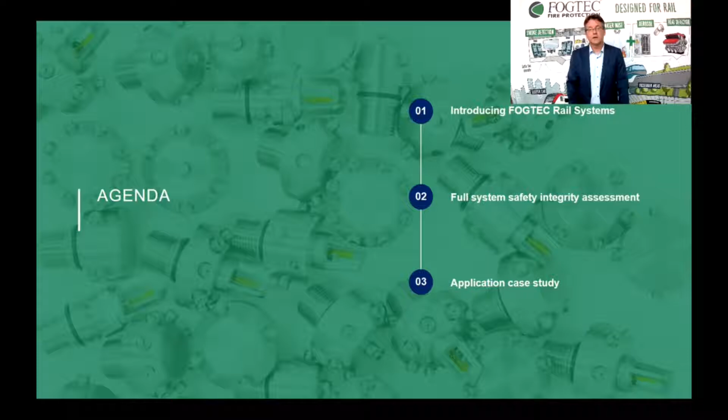Let's have a short look at the agenda of today. I would like to give a quick introduction of FOGTEC Rail Systems and then a more detailed look at the full system safety integrity assessment, and at the end also give an application case as an example.

FOGTEC Fire Protection, based in Cologne in Germany, was founded in 1997 and is a typical small and medium enterprise, and a so-called hidden champion from Germany. The team is mainly based on engineers, and more than 45 partners around the world are supporting the FOGTEC company to implement, integrate, sell, and develop the FOGTEC systems for all different kinds of applications.

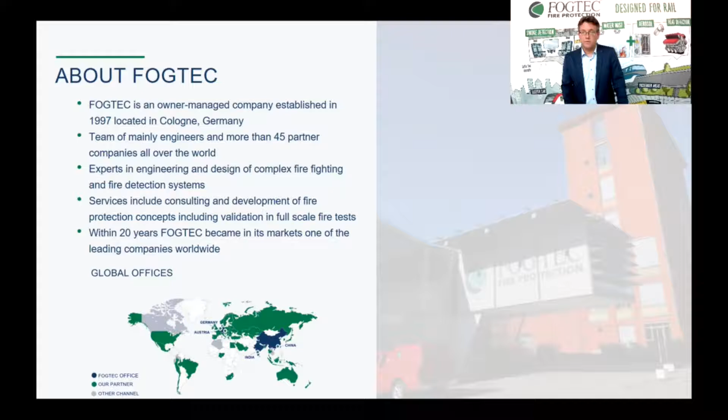Mainly three business units are active in FOGTEC. We have the fixed systems, which takes care of building and industrial applications, the tunnel systems, which are used in underground infrastructure, and the FOGTEC rail systems, which takes care of rolling stock applications.

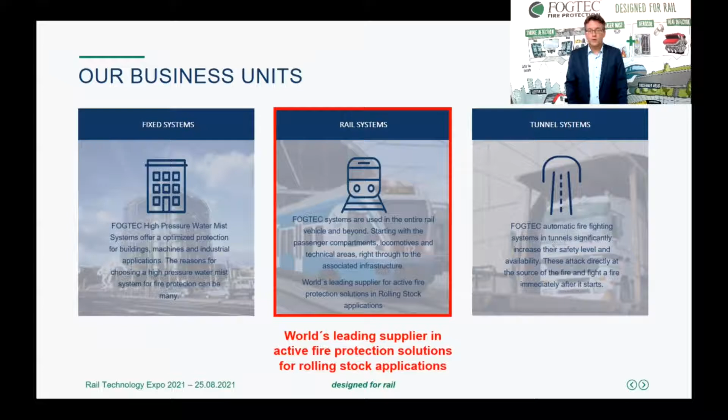And this part is also what we want to have a more detailed look at today, as a world's leading supplier in active fire protection solutions for rolling stock.

FOGTEC rail systems, that means a team, a system provider for active fire protection systems, fire detection, fire suppression, but also the communication behind it. In rolling stock applications, a system integrator with full system verification programs and with its wide product portfolio for railway-specific systems, covering different levels of technology and safety.

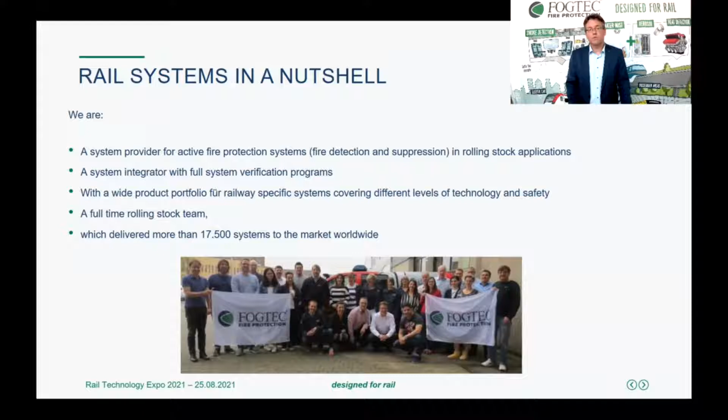One of the big advantages of FOGTEC, an IRIS certified company, is a full-time rolling stock team and a wide range of references with more than 17,500 systems around the world.

If we speak about the FOGTEC products, there's a wide range of different technical levels for CPUs, smoke detectors, heat detectors, and several other detectors, like the in India already well-known smoke aspiration systems, and different kinds of solutions.

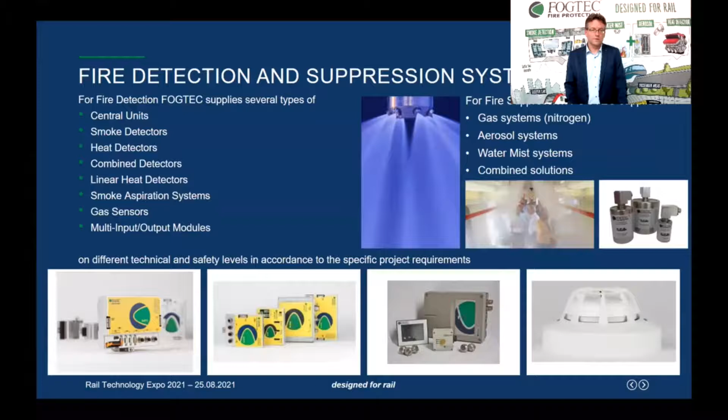Here we can see just an example of how the FOGTEC system, here based on the 5000 series, which is the most used solution, certified up to SIL 2 in the market, is integrated into a train: a centralized CPU, fire detection in passenger areas by smoke or heat detectors, linear heat detectors in the technical areas, a water mist system in the passenger area, and aerosol generator systems in the technical areas.

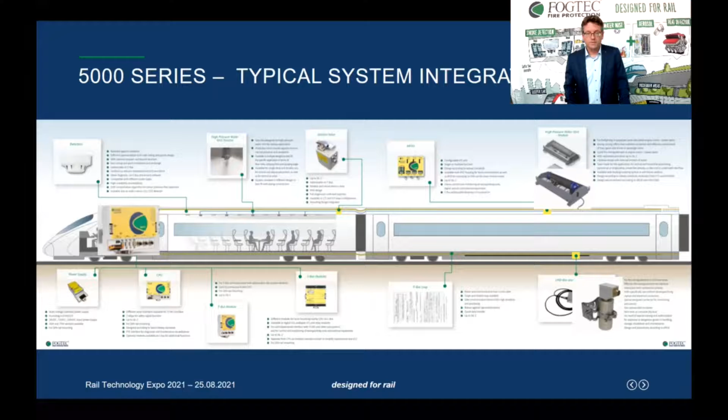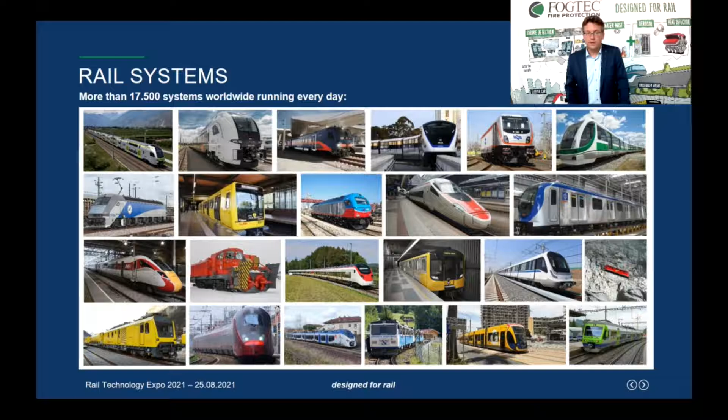Systems like this, or products from our other portfolio with more simple solutions, are used in more than 17,500 systems around the world in metro trains, LRVs, monorails, DMUs, EMUs for regional and long distance traffic, high-speed trains, electric and diesel locomotives, and special trains like for maintenance, cog railways, or night trains with sleeper cars.

But there's also a specific reason that we would like to speak about full system safety integrity assessment today to you. With the developments in our market, we can see that safety, SIL, and similar words and definitions are used more and more and become more and more important.

On the other side, safety, SIL, and other terms are used, unfortunately, a lot of times in the wrong context. And to avoid any misleading action or decision not following the requirements given in the standards, we would like to give a short overview of what it means, at the end, to have a full system safety integrity assessment.

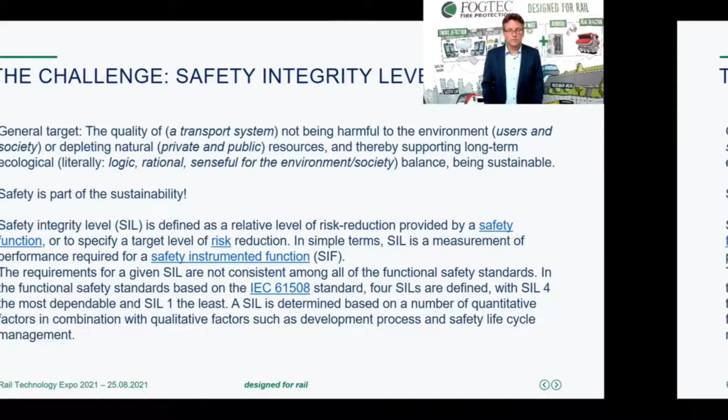The big challenge is the safety integrity level, but basically it could be reduced to safety functions, which have to be defined.

And looking at the markets, the projects, and the development of requirements, we have to understand that an increase in safety, with additional efforts, consultants, and own resources to fulfill the requirements given by higher safety levels, would unfortunately always mean an increase in cost for such systems.

On the other side, unfortunately, a SIL 2 certified or SIL certified system is used very often in the wrong way. System here means, for example, not a few parts or a component — it means that all components of a system have to be certified and run through an assessment.

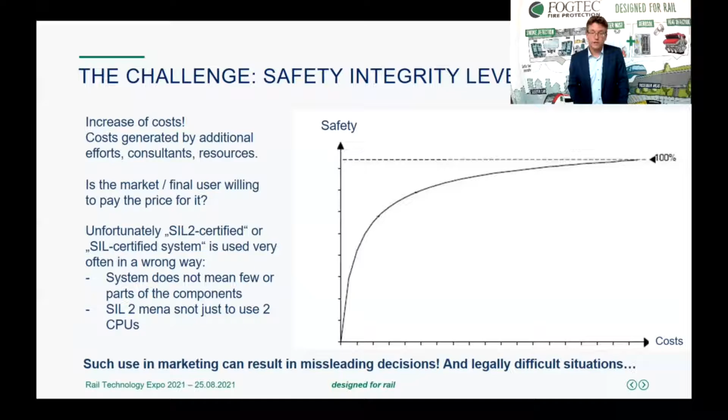I also learned, talking to some customers, that people explained to them that SIL 2 would just mean using 2 CPUs in such a system like we provide to the market. This shows how wide the range of lack of knowledge is in the market, and there's a big need for education. Such use, maybe just for marketing, can result in misleading decisions and legally difficult situations at the end for the people making use of the solutions.

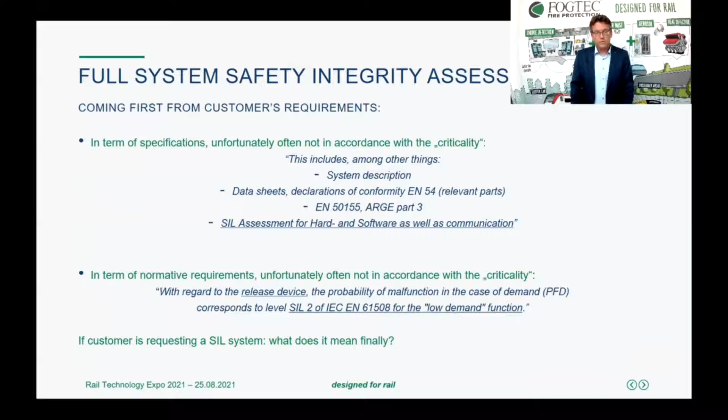If we look to specifications or normative requirements, sometimes it's not really detailed what is requested from the supplier. First of all, there should be a clear agreement about the needed safety functions for a subsystem and the related SIL level which has to be fulfilled. So if the customer is requesting a SIL system, what does it mean finally, and how to find the right solution to fulfill this requirement on a legally right base.

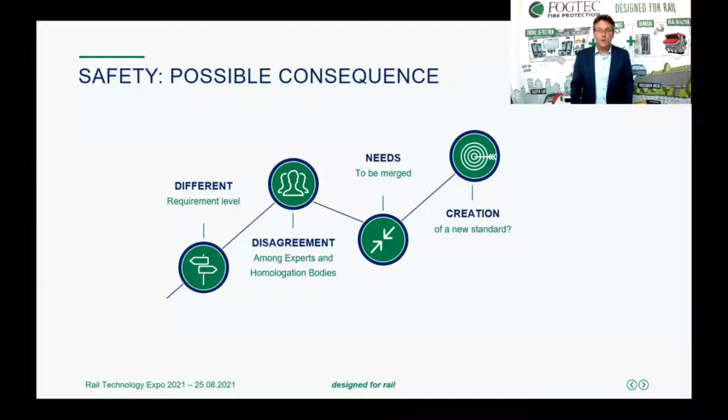This needs always a lot of discussions and clarifications between the parties. But at the end, there should be a target which is clearly defined and which the customer can expect the supplier to fulfill. If we look to the FOGTEC approach, when we started the development of the actual Series 5000, we came from the basic integrity level version in parallel to the SIL solution, because there's a specific own development on that, as SIL 2 is also covering the development process for such a system.

So it means for already developed parts and components, it would be difficult to get a real SIL 2 certification.

Our aim was to have a modular solution, highly flexible, designed for platforms and with full redundancy in communication. We started in 2012 already with the first developments. In end of 2015, we were able to supply the first systems. And at the end, in 2018, we could make a party, let's say, for our first complete system SIL 2 assessment with a certificate.

SIL 2 means here not only some parts of the system are certified or run through an assessment - the whole process of development, hardware, software, and system assessment was done until the last screw. And if it works well, at the end, such a certificate is there, which you can provide to your customers.

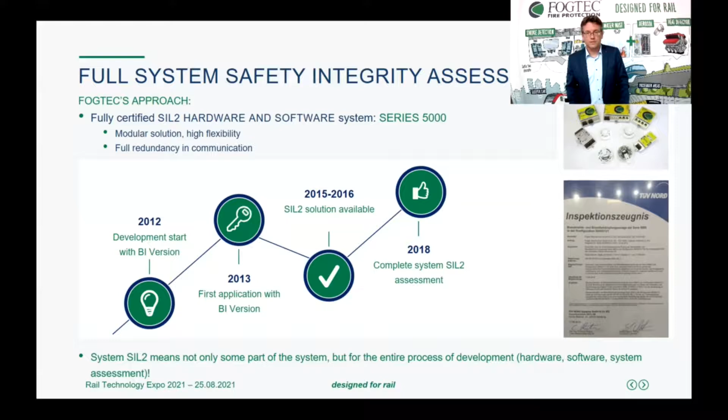If we speak about full system safety integrity assessment, then we have to start from the component level. With the choice of material, we also have to take care about EN 45545, failure modes and related failure rates to meet the reliability targets.

The whole development process has to be assessed by the third-party checkers. And then the validation for all the components has to be done, mostly following EN 50155. And you all know that there was a change in 2017 in the standards, which brings additional efforts and requirements to the components. And all these requirements have to be fulfilled by each single component.

Afterwards, when you move to the system level, a project process according to EN 50126 has to be started for the project itself. The software assessment has to be started according to EN 50657, and then a complete system assessment after you did the software as well as the component assessment. Then you can do the complete system assessment in accordance with EN 50129.

For ourselves, for Series 5000, unfortunately I have to say that we terribly underestimated efforts and costs, and we extended the budget terribly the same way as the time. But at the end, it was done.

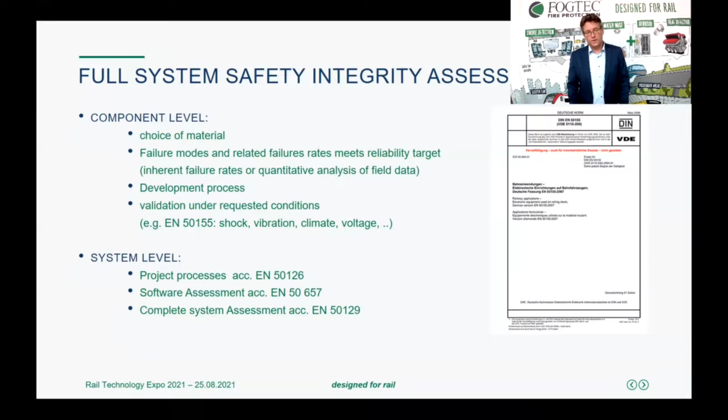And of course, we are looking to bring the documents to these third-party checkers, and have to be assessed from the independent bodies. At the end, there's a huge amount of documentation, a lot of validation efforts requested, always to verify your solution against your specification.

And for each single component, it has to be validated again against EN 50126 as well as EN 50155. Then the software assessment, which I will say something additionally on the next slide, has to follow the rules of EN 50657, and then a complete system assessment has to be done in accordance with EN 50129.

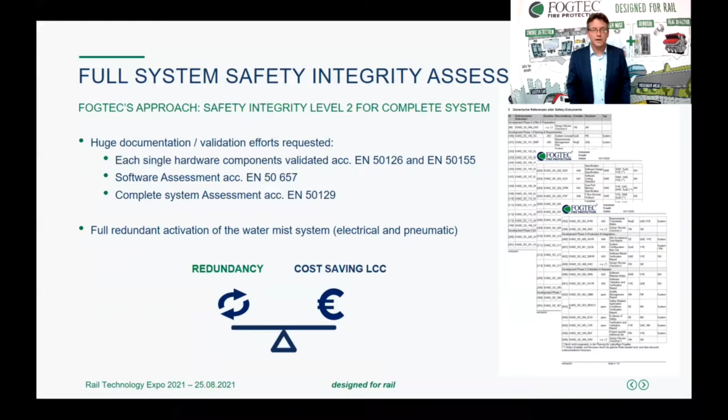EN 50657 came during a time when we were in development on Series 5000, and unfortunately it made a lot of difficulties for us during this development process, because the standard is also requesting changes in your organization and into the company structure, and also to the resource management.

And looking to all the documents which have to be provided, there should be also a very good risk management system behind to understand the real needs and what your company is willing to go and to supply. What we can recommend is that an IRIS certified company, which has normally already implemented a very good risk management solution or process, would have a very good base to fulfill also the requirements in regard to EN 50657.

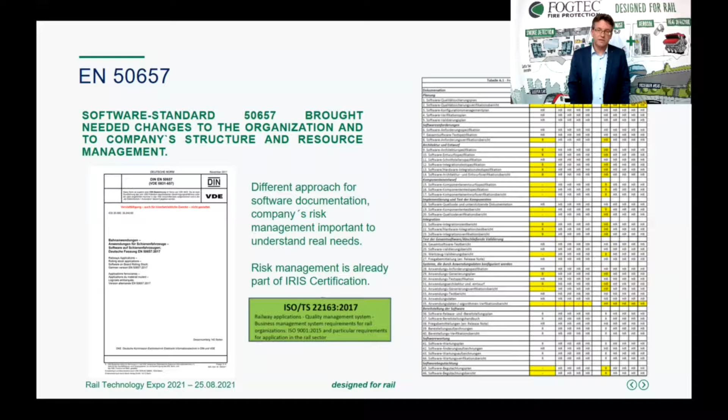And for software, as you all know, it's not simply programming, which is done very fast and taking maybe only 10% of the time, while unit tests, documentation, bug fixing, and all the other things around is a much bigger part of the efforts and also the costs.

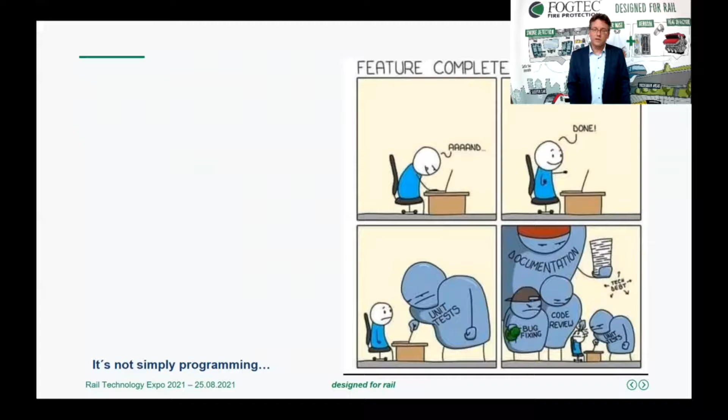To give an idea about a case study where this solution is already in place with our systems, there's the STADLER EC250, called from STADLER GIRUNO as a product family name, and it's called by Swiss Railway SMILE.

This project started in 2015 for us. This SMILE train is an 11 car unit, 200 meters long, with 29 train sets in the whole project. The homologation has to run for Switzerland, Germany, and Italy, and the revenue service should start in 2019.

And the certificate, which you saw a few slides before, released in 2018, was exactly for this project. So in 2018, this job was done and ready right in time for the revenue services.

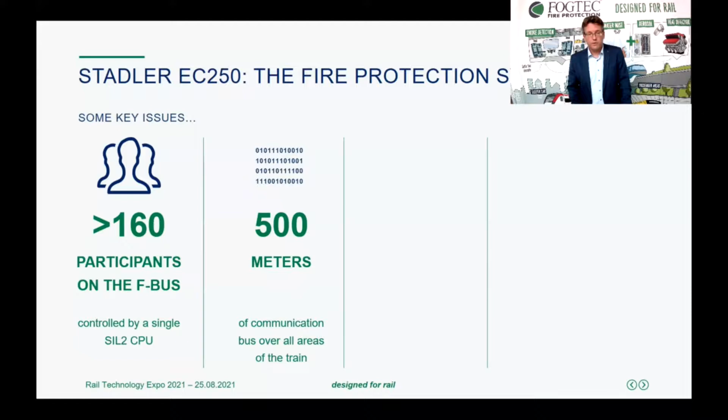Some further key issues: in our system here, we have more than 160 participants on the F-bus, controlled by a single CPU. The whole bus communication cables run through 500 meters in length. There's one centralized cylinder system on the train.

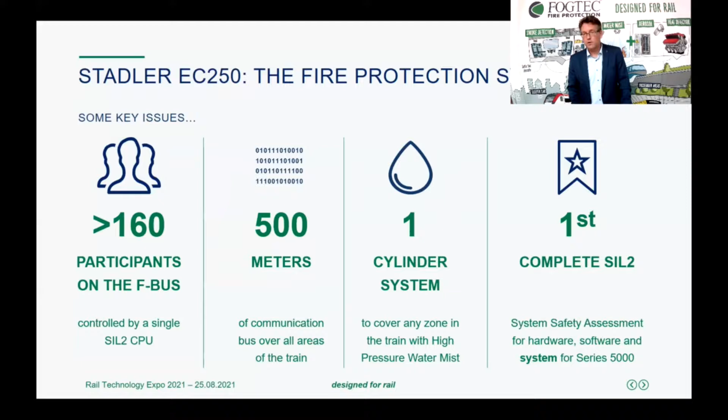And it's the first complete SIL2 system with a full assessment for hardware, software, and system in accordance to EN 50129.

In this train, we're using smoke detectors for the passenger area, the crew area, the galley, the driver's cab, and in some low voltage technical areas. Multi-criteria smoke and heat detectors in toilets, and linear heat detection system in medium and high voltage areas.

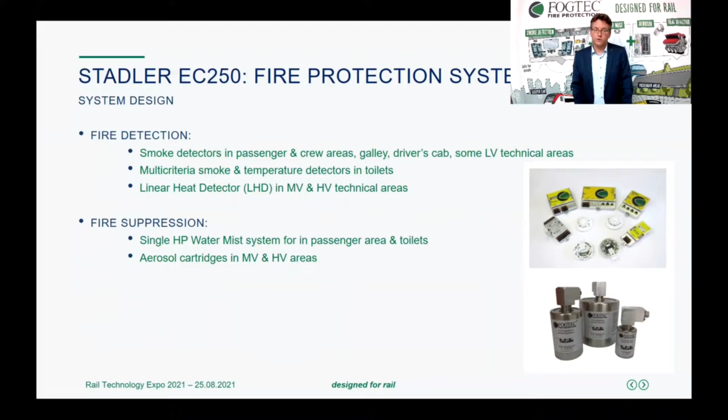Fire suppression system, water mist system, high pressure water mist system is used for passenger area and toilets, while in medium and high voltage areas, aerosol generator system is used.

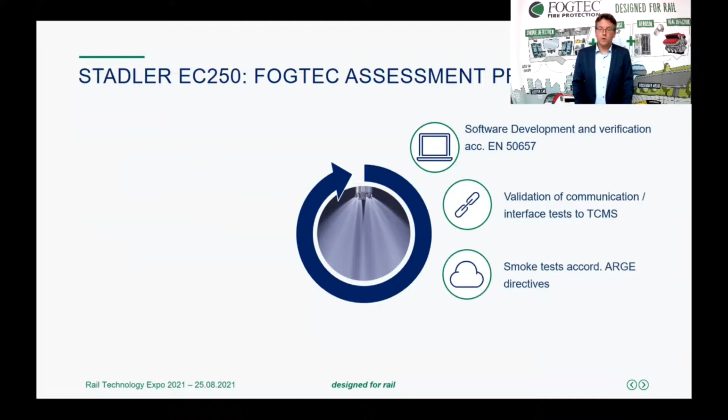The whole process during this project was software development and verification in accordance to EN 50657, validation of communication and interface tests to the TCMS, smoke tests for the positioning of the smoke detectors in the train in accordance to ARGE directives. There were also fire tests done to prove against ARGE directives, but also to cover Italian requirements.

Then there was a special validation procedure for the heating system, because you can imagine with a high pressure water mist system, you have to transport water, and during cold winters, you have to take care that it's not freezing.

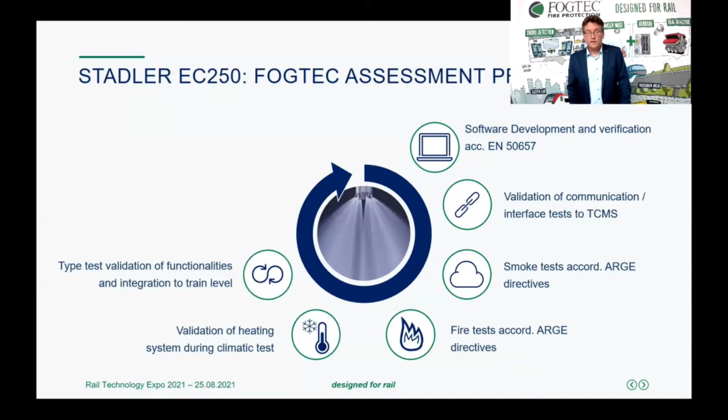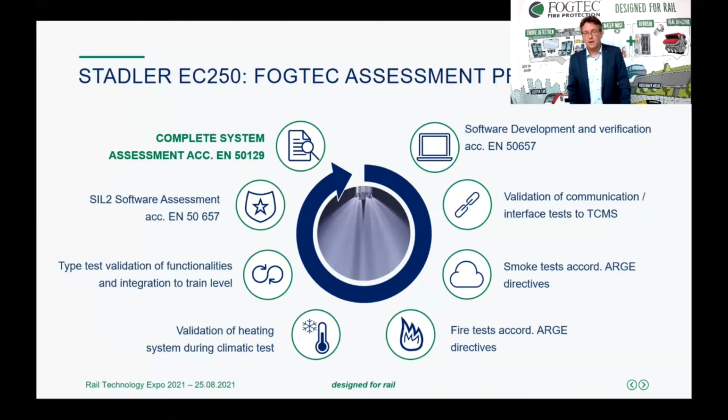This type test validates functionalities and the integration to the train level. SIL2 software assessment in accordance to EN 50657 through a third-party checker. And at the end, also a complete system assessment in accordance to EN 50129, where we had to add the already done hardware assessment for each single component.

On the train itself, there was the smoke test running for the right positioning of detectors, while in accordance to the ARGE directive, 60 seconds was the maximum allowed detection time for passenger area and crew area, and in technical areas, 120 seconds.

For this whole 11-car train, there was one complete week of measuring campaign with testing in all possible operational conditions, as well as all possible places.

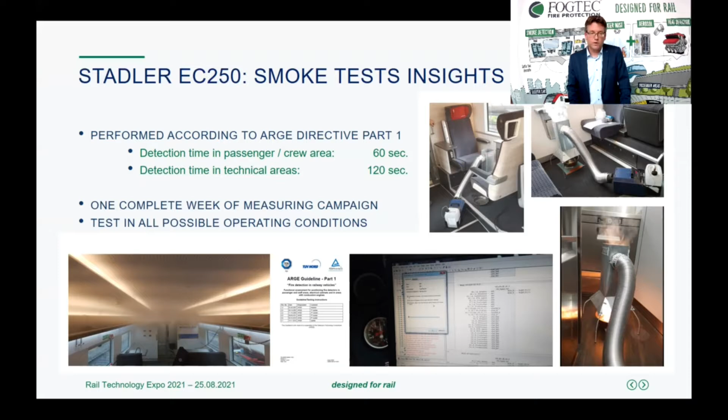At the end, we also did full-scale fire tests to demonstrate the performance in accordance to the ARGE Directive Part 2.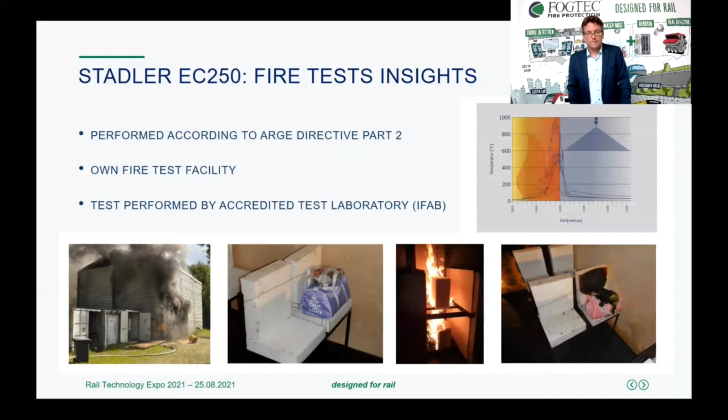And at the end, as you know it already from our markets, there are documents, documents, and documents. In our first project, I checked this just to see how many documents we have to supply in actual orders. In first projects in 1998, we supplied just a data sheet and a simple operation manual. Today, such projects like the EC250 we saw before have always more than 200 different documents to be supplied. For us that also means we now have more people in technical documentation than in the sales department.

And there will also be some case studies for understanding how to proceed with such requirements.